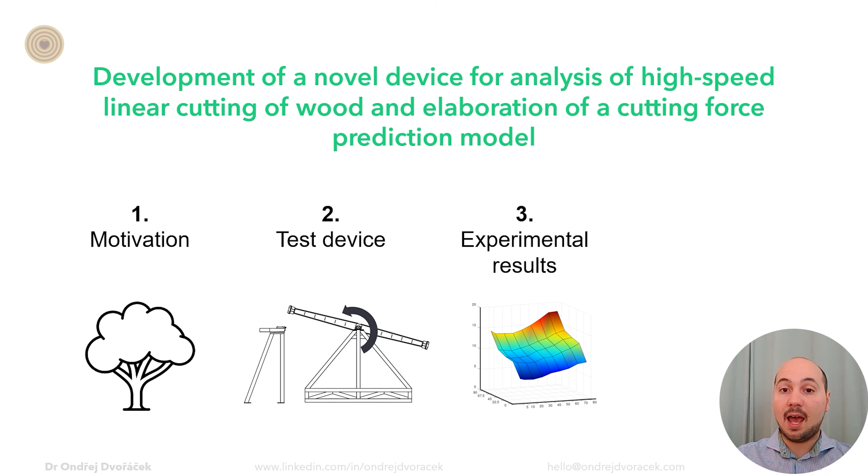The question I was concerned about during recent years was how we can measure and predict forces precisely. My presentation today consists of 4 parts. The first is focused on wood cutting. I'm going to first express the motivation for the research. To conduct it, it was necessary to develop a new test setup. Then I will present the results of the cutting analysis, and finally I will show you the established force prediction model.

Wood is amazing - 100% natural, renewable and beautiful material. Especially now, our planet has limited resources in contrast to increasing demand. When wood becomes waste, it can simply fertilize new plants - we can simply regrow it. Due to these reasons, wood is a perfect material for engineering purposes. The problem for engineers is it's a very unpredictable material due to natural phenomena.

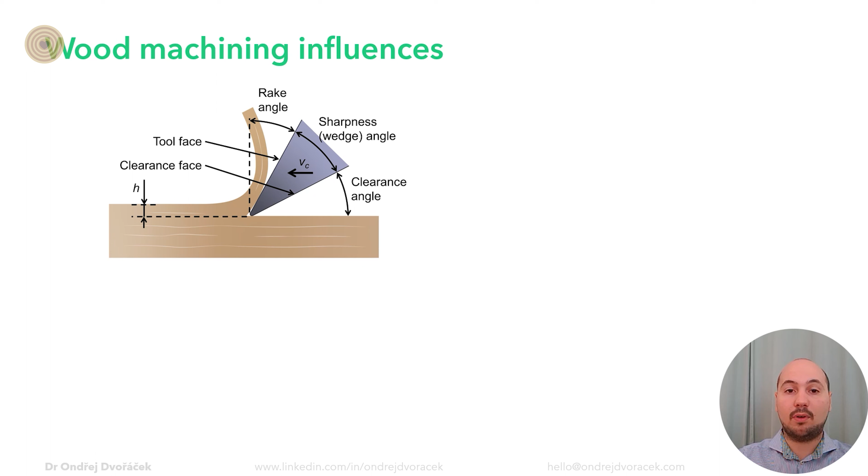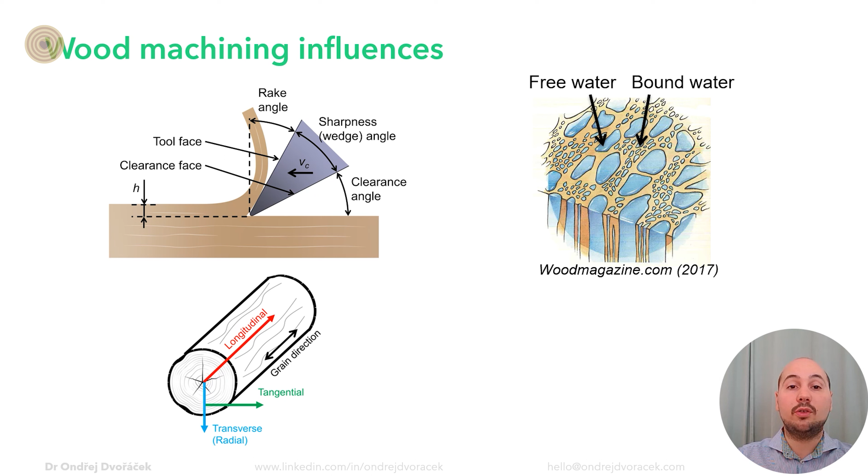When I focus directly on cutting, what influences it? Standard parameters as for metallic materials: rake angle, chip thickness, cutting velocity. But furthermore, there are influences from natural material - for example, moisture content, as wood is usually full of water. Wood is also a fibrous material, so according to the cutting direction, the interaction changes as well as the disintegration mechanism. During commonly used sawing, the cutting edge goes through multiple wood layers of different densities and mechanical properties.

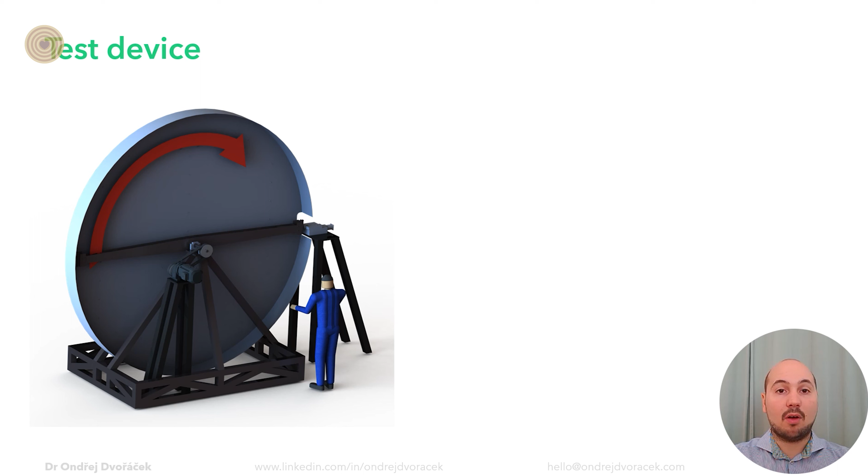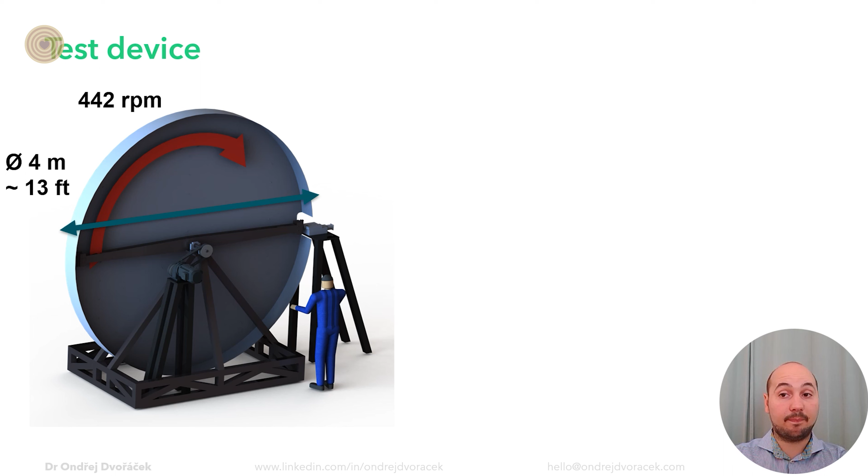For the research, it was necessary to develop a test device. This unique device works on the principle of a rotor arm. The rotor arm reaches an angular speed of up to 442 rotations per minute. Due to the rotor arm diameter of 4 meters, the movement of its end can be considered linear. That corresponds to a tangential cutting velocity of 93 meters per second.

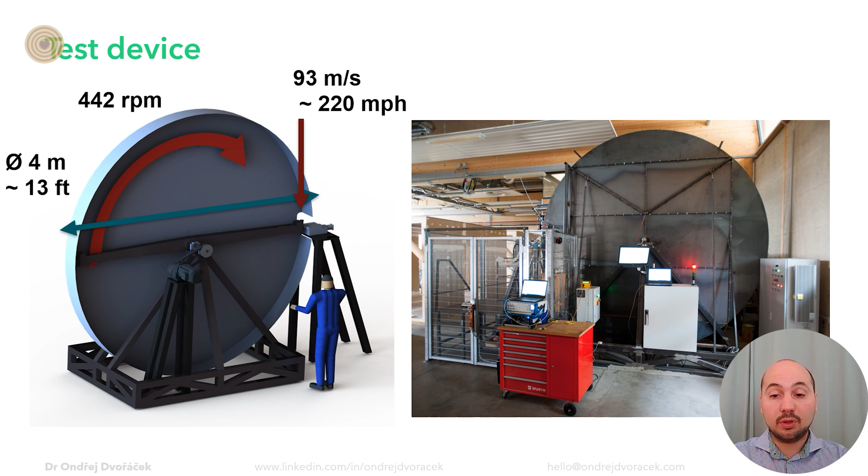The whole device stands in the laboratory in Tulln, Austria. A wooden sample is, during examination, placed on the end of the rotor arm. For lowering the initial impact, wood is placed between 2 polyurethane blocks. The knife is placed oppositely on a precise 3D quartz force sensor. Where the rotor arm reaches the knife, the cut occurs. A single cut per examination is conducted - this eliminates the influence of the previous cut.

The combination of these test parameters opens a unique possibility to investigate wood cutting. The stand-alone cut at this speed has never been performed before. Furthermore, the linearity approximation enables better insight into the process.

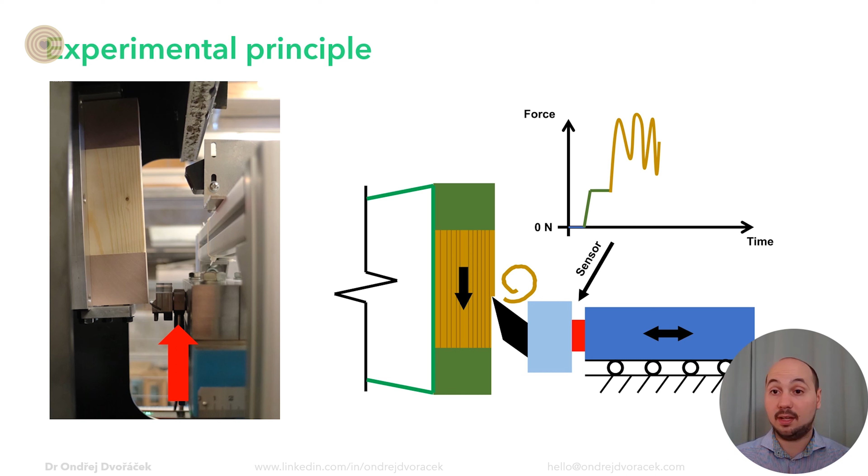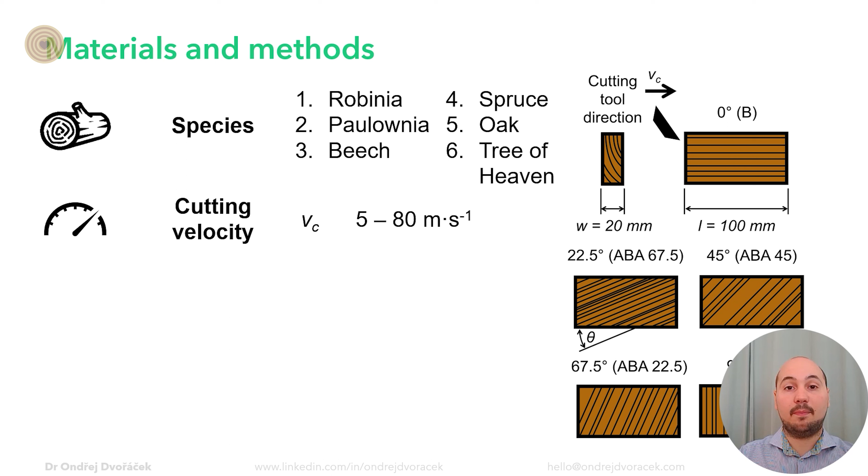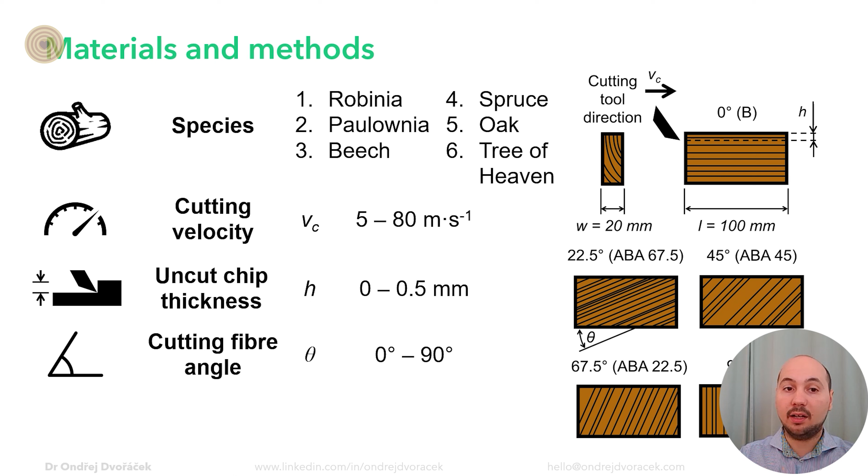Then I evaluated the device and used it to acquire data about hardwood cutting. The main set of tests was performed on 6 different species. Samples were examined at 9 cutting velocities ranging from 5 to 80 meters per second, at many different chip thicknesses from 0 millimeters, touching the surface without splitting, to 0.5 millimeters, and at 5 different cutting fiber angles from along the grain, 0 degrees, to across the wood grain, 90 degrees. Samples were climatized to 6 different moisture content levels from 0%, completely dry, to over-saturated samples.

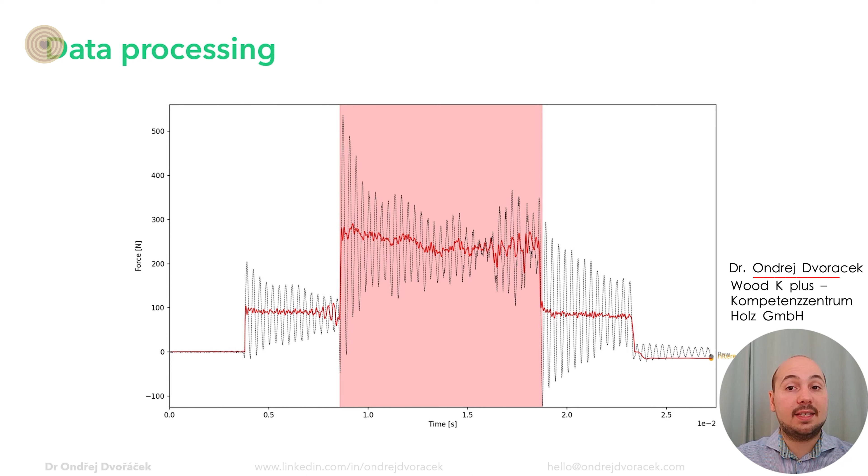So finally we got data that was trustable. Original data is gray and corrected data is red. From the experiment record, just the cutting process was chosen, highlighted in red color. Before and after is the cutting of the polyurethane blocks. From this acquisition, the mean peak force was evaluated.

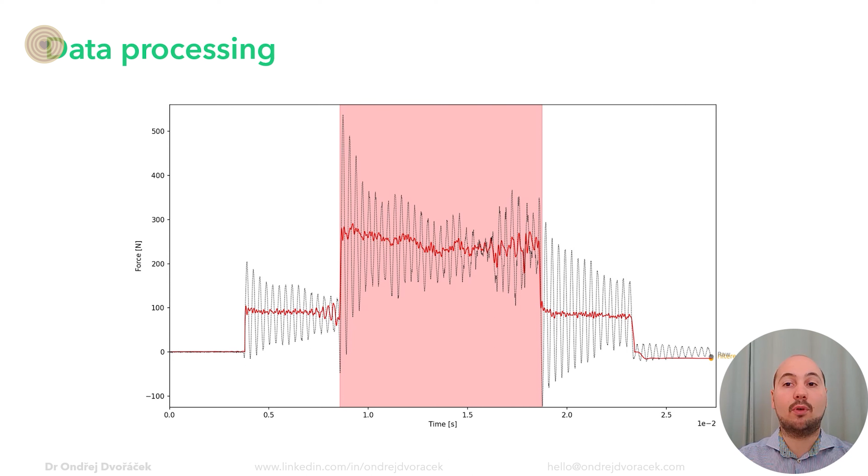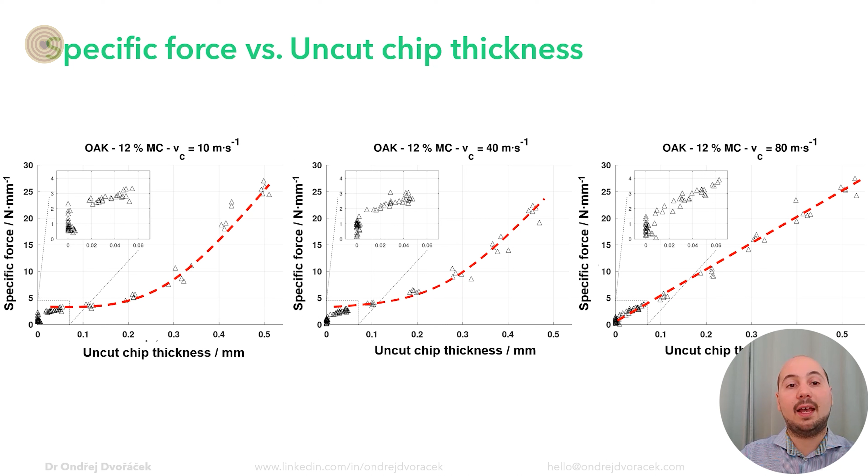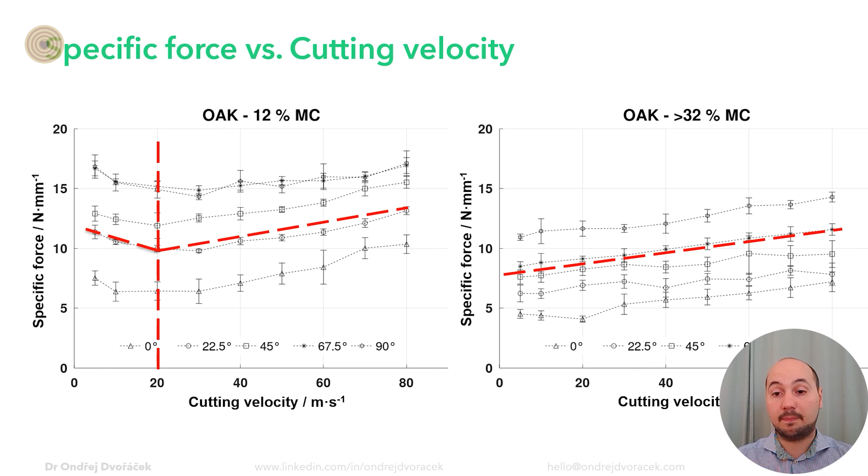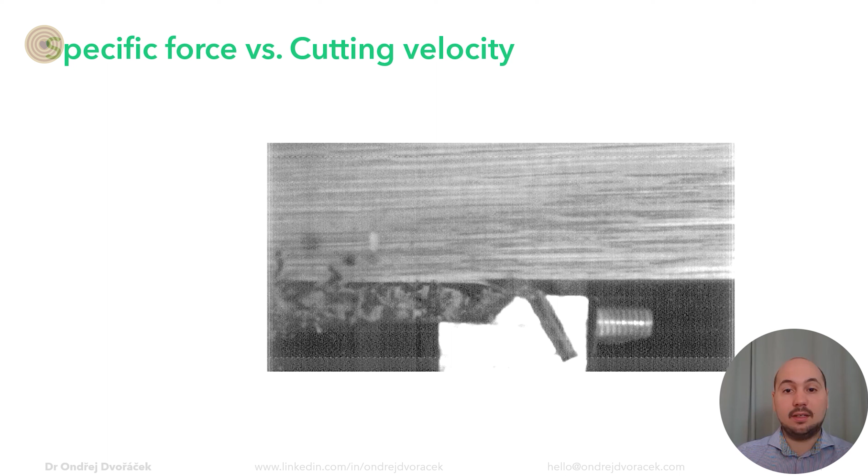A big help in the evaluation was the high-speed camera. In the recordings, you can see the wood and the knife. The cutting velocity is in this direction.

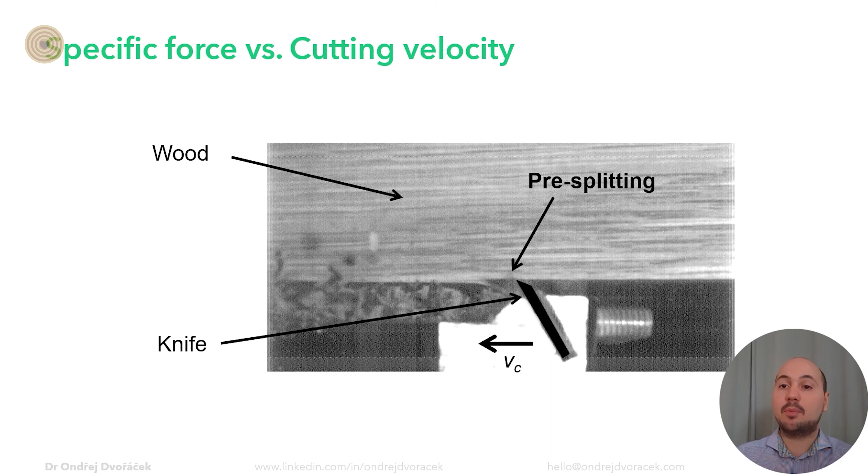On the previous slide, we saw the difference between cutting at different velocities. Here you can see the reason why the forces are different values at different speeds. It's so-called pre-splitting, meaning that the crack propagates in front of the tip of the knife. I will show you two pictures.

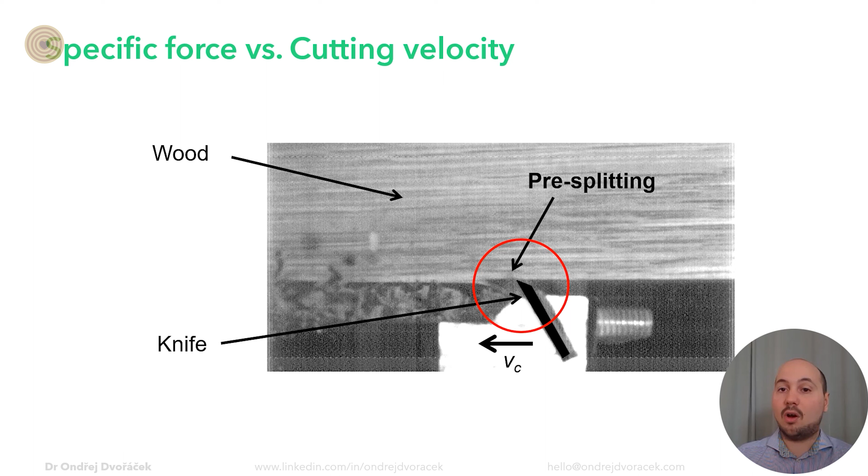Focused on the surrounding of the tip: at low speeds, the pre-splitting crack is significantly longer than at a speed of 80 meters per second. At the speed of 20 meters per second, the knife velocity and crack propagation velocity are similar. That helps the knife go through the material with the least resistance.

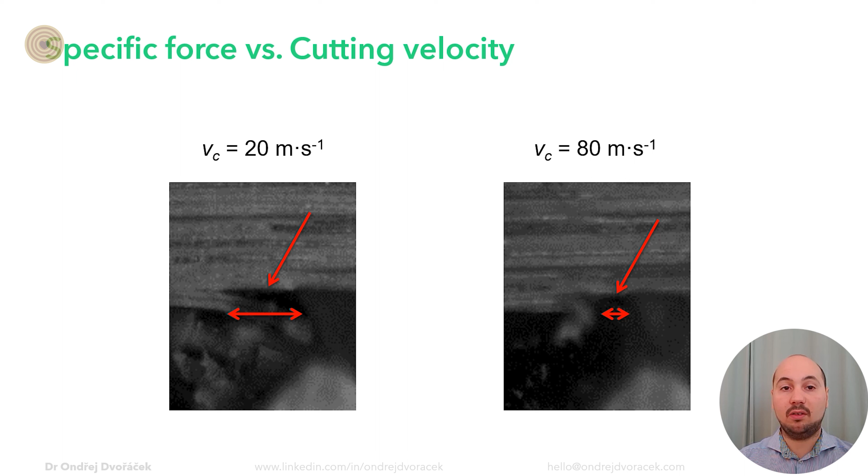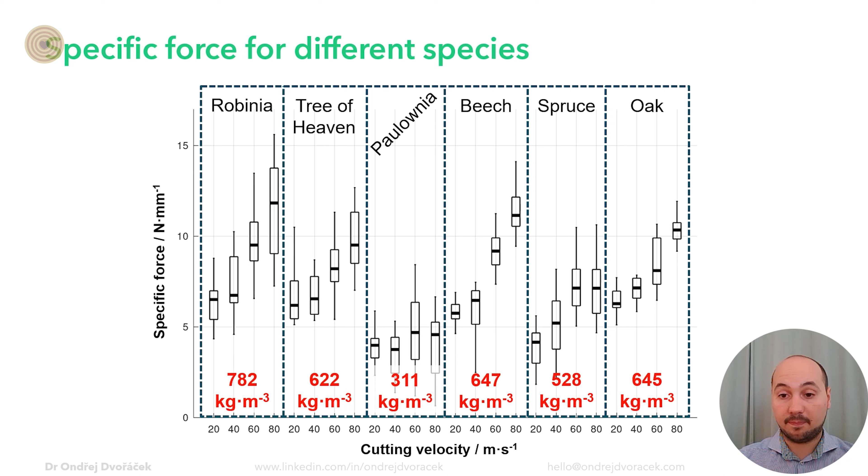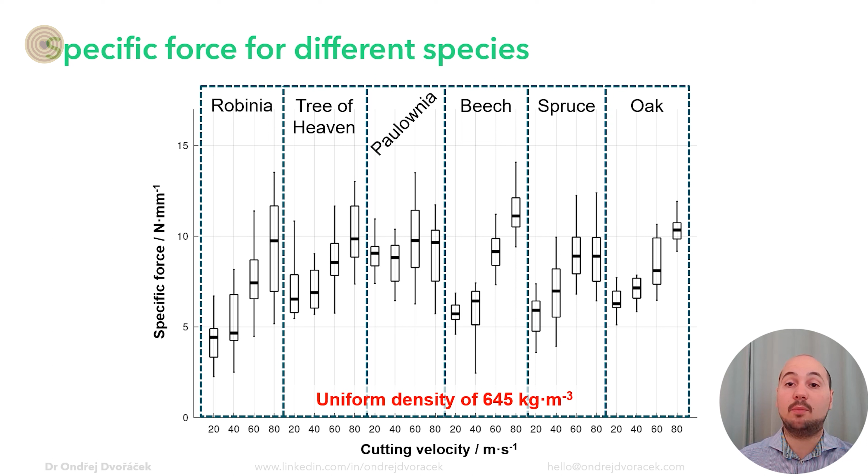When I standardize it, the data looks like this. Robinia and beech need very low force to be cut, but with increasing speed it grows rapidly. Other species keep more uniform cutting force for all cutting speeds.

Finally, almost 5,000 measured data points that I presented until now were collected and incorporated into the prediction model. The first part of the prediction model is an equation in the form of a trivariate cubic polynomial, including independent variables of moisture content, cutting fiber angle, and cutting velocity.

By multiple application of the least square method, the parameters were found. Then the evaluation matched the measured data with predicted coefficient of determination of 0.88. The standard deviation between measured and predicted values is a little over 1 Newton per millimeter.

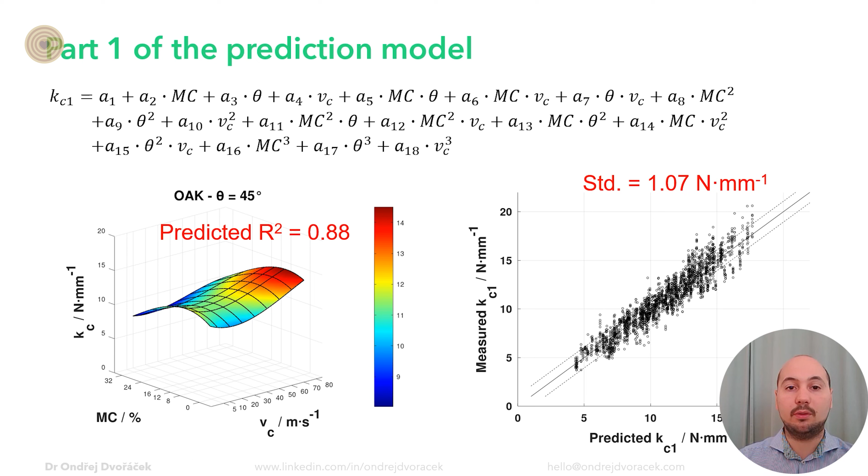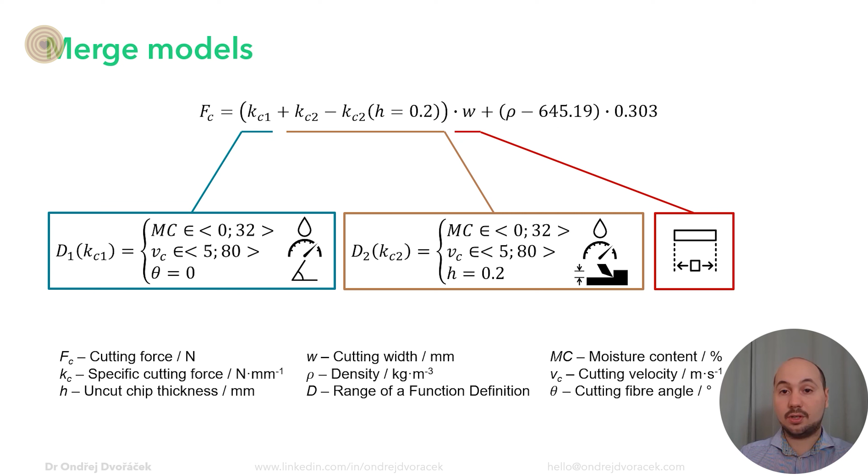The model contains more parts that need to be connected. It's done by their common range of parameters to increase the number of variables. Furthermore, I added to the equation a multiplication according to cutting width and a correction in accordance with the wood density.

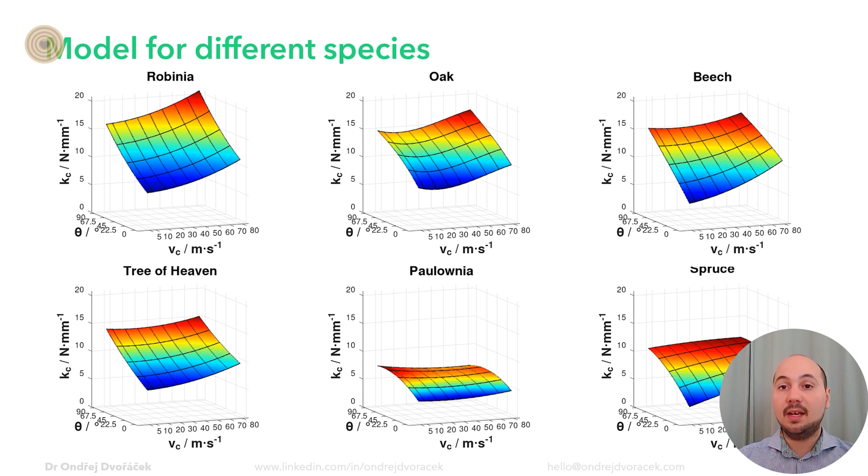Similar to that, I created the cutting model for other species. Interestingly, you can observe that Paulownia and spruce are not as strongly dependent on the cutting fiber angle, especially compared to the other tree species. Paulownia keeps the cutting force very uniform for all parameter sets.

And how can we use this prediction model? I and the co-authors of the publication inserted this model into a web calculator. You can find it at ondrejdvoracek.github.io. You insert moisture content, cutting fiber angle, cutting velocity, density, uncut chip thickness, and cutting width, and it calculates the cutting force according to the model.

Now let me conclude the research I have done during the last years. I developed a novel test rig that can approximate linear cutting and measure cutting forces at speeds not measured before. I optimized the device settings, and what couldn't be optimized I investigated and described. Therefore, with this device I achieved reproducible results.

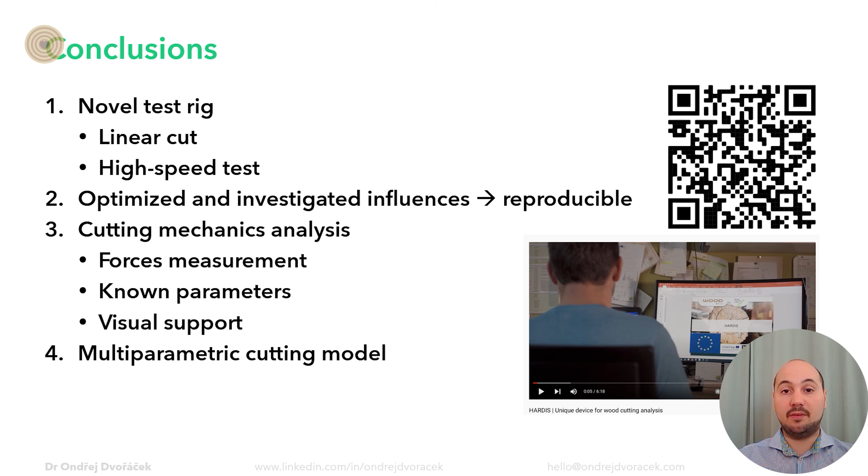I performed extensive experimental research where I measured forces for known parameters. Sometimes high-speed cameras also recorded the cutting process. Finally, I developed a prediction model for the many parameters involved. If you want to know more about the device, you can watch the video under this QR code.